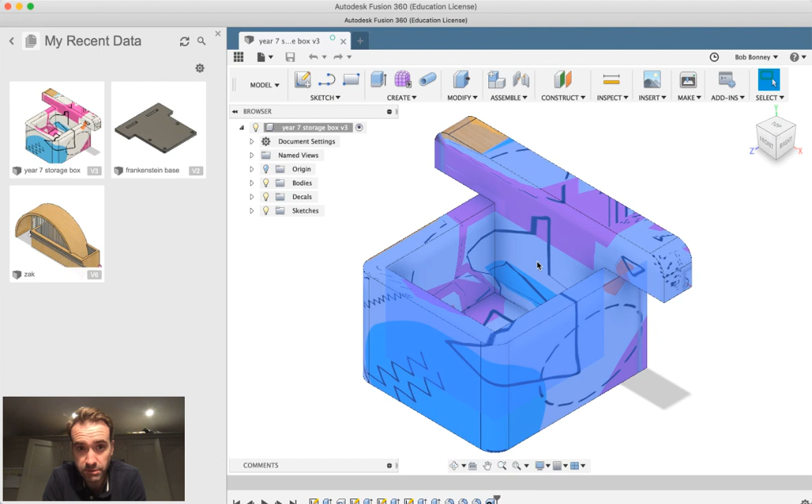This is a bit of an intro into Fusion 360, and as you can see, what we're going to do is we're going to create your Year 7 wooden storage box, and then we're going to add either Memphis or Art Deco as a design style decal, it's called, around the outside.

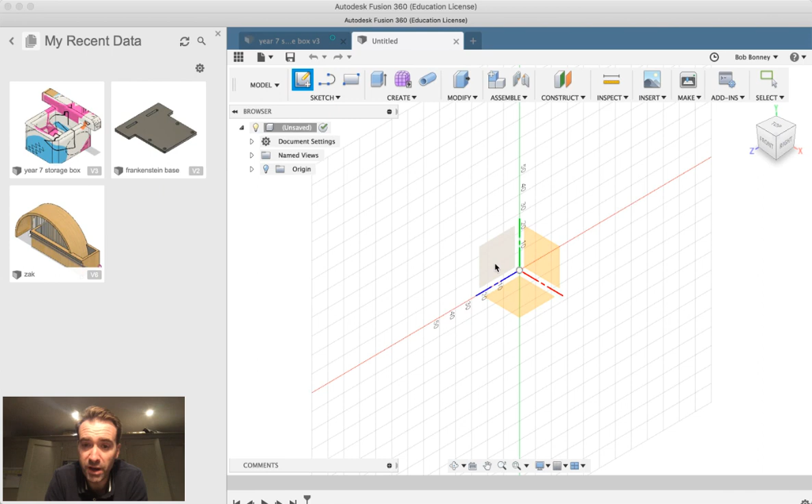So you should have logged on, you should have opened up Fusion 360. So we are going to start with a new file, new design. You create a sketch by clicking on the create sketch button, and these are our 3 planes. We're going to select the one at the bottom because that's the ground, and we are going to add a new sketch rectangle 2 point.

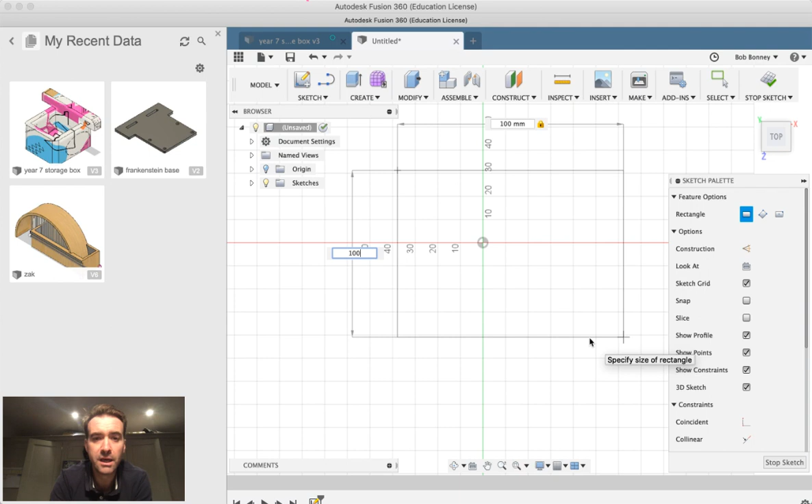Now just draw a square, click and drag and draw a square. Now if I just type in 100, then hit the Alt key or the Tab key and hit 100 again and hit enter, that gives me a square, okay, of 100 mil either side. What we're going to do now is we are going to extrude this square, so we can either press the E key, or up here there is the actual extrude button.

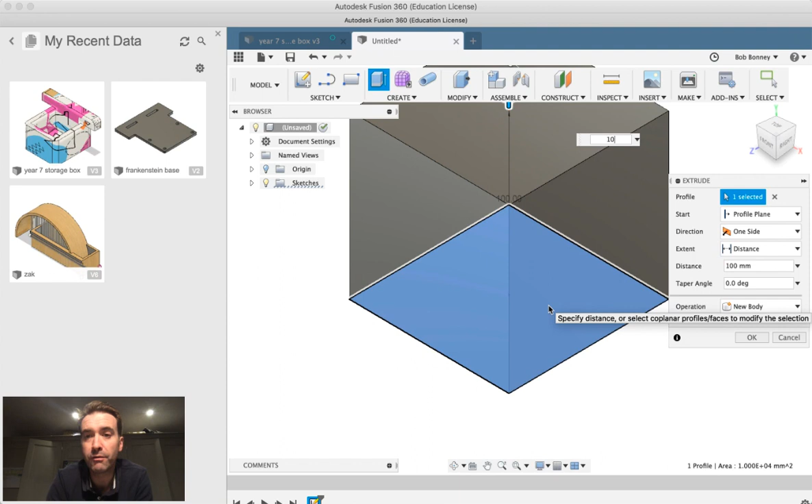Click on the surface that we want to extrude, which is that one, and I'm going to type in 100, or you could have just clicked and pulled this up, okay, but because I know I want it to be 100, I'm just going to make it a cube. Actually, change that. I am going to extrude up to 65, not 100, apologies. Okay, so there's my box.

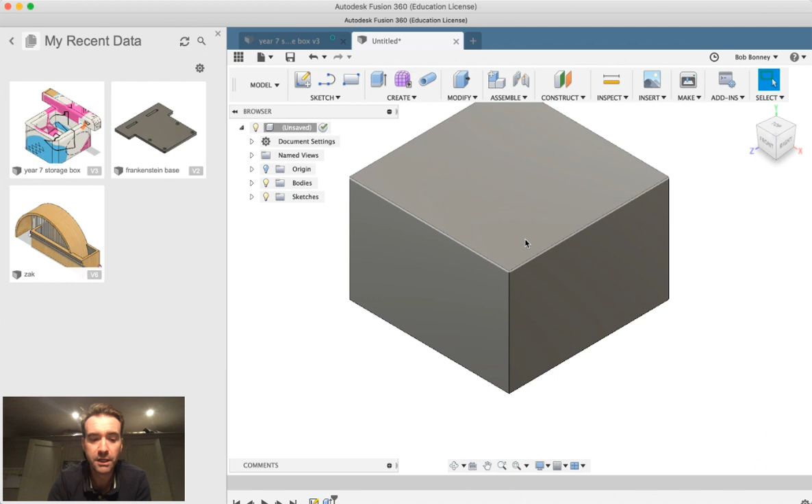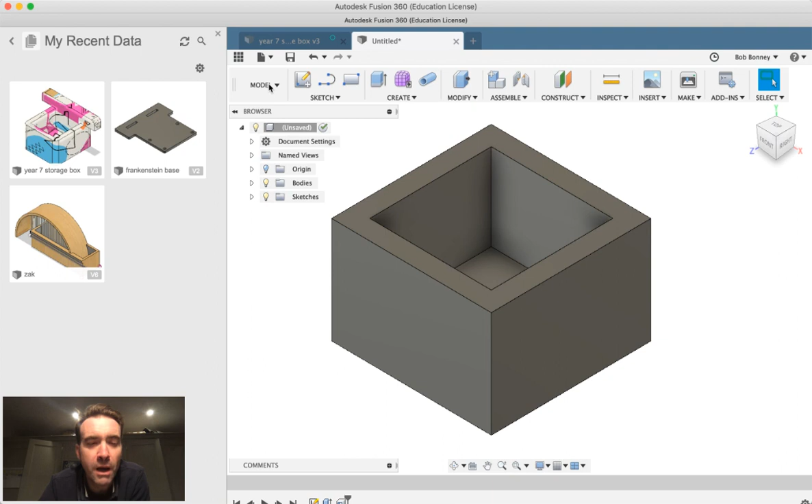But we all know that our storage unit we made is hollow. So a little top tip for that is to hold the right mouse click down and go to shell. Now the thickness of this is 12 mil, so I'm going to hit enter. And what we can do is we can actually see our box. Now, I think we should turn it into wood now. So we'll go up to model and hold down model if it lets me, and go to render.

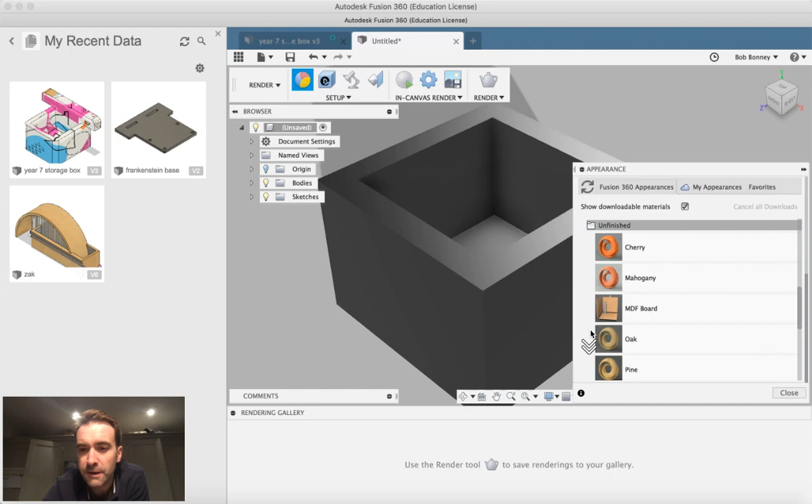Now this is a really cool place where we go to actually render what our actual sides look like, what material it's going to be. This beach ball thing is the appearance. If we click on that, it will open up another window. And if we scroll down and find wood, unfinished, and I might just drag and drop this pine on there. So I think that looks quite cool. Hit render and go back to your model.

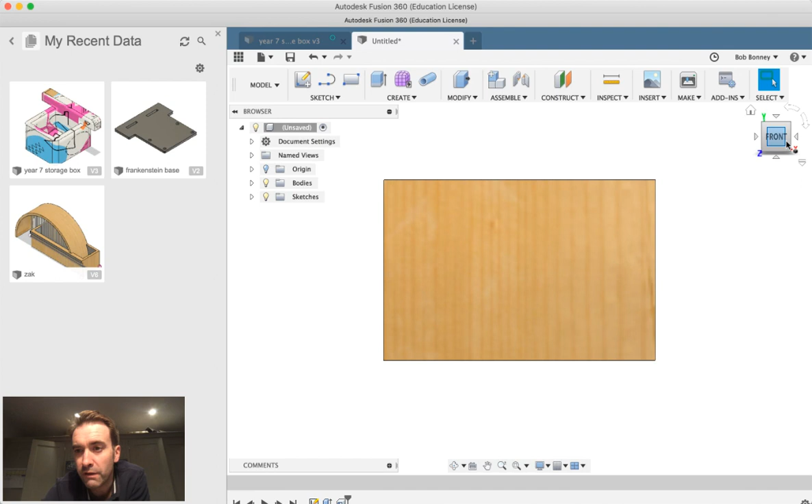Now it doesn't really look like our box yet because it has, and by the way, if you come up here, if you just wait till it highlights an area, you can go to the top, to the front, to the sides, or if you just wait and click on it to the right or to the left, you can actually click and drag, or if you want to reset it again, just hit the home button. And to zoom out on your mouse, you'll have a roller ball, or if you're on a trackpad, you just need to squeeze your fingers together on the trackpad to make it zoom in or zoom out.

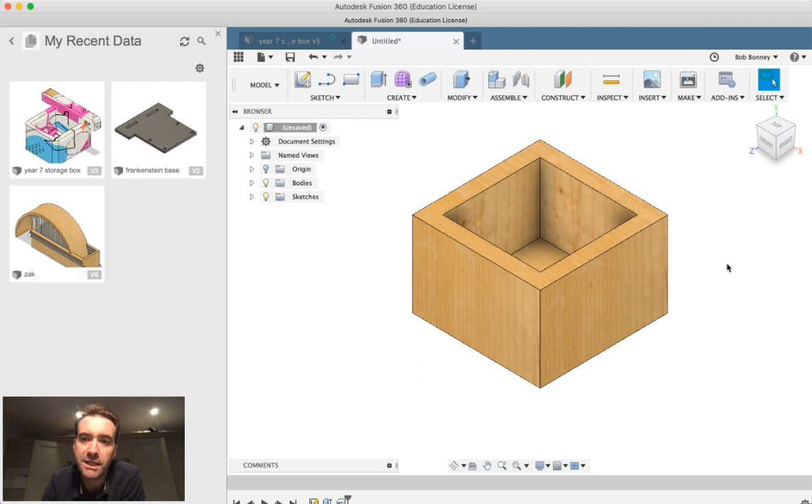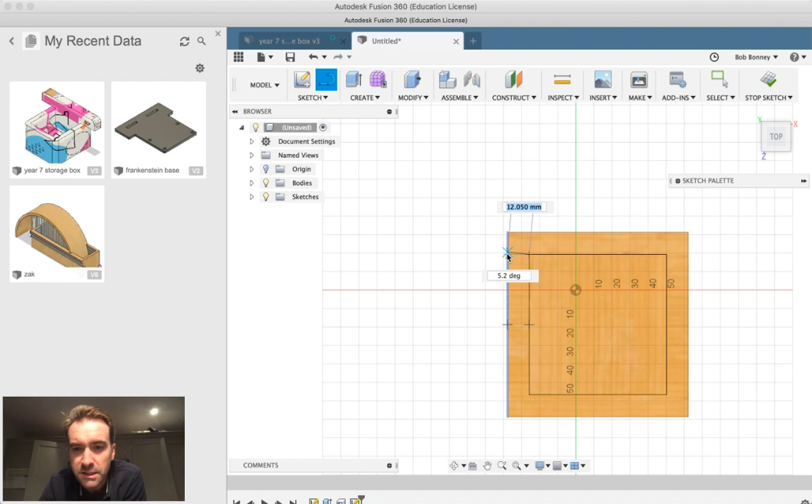There you go. So let's add the T piece at the back now. So if you click on it so that it highlights and create a sketch, I want to use the line tool, and I'm just going to move that out of the way. Click on the corner and go out. Now what Fusion does is it either snaps so it's straight, or what you can do is hold the shift key down, which is the triangle, which is the one above the function key, and hit the green arrow, and then same again on this side.

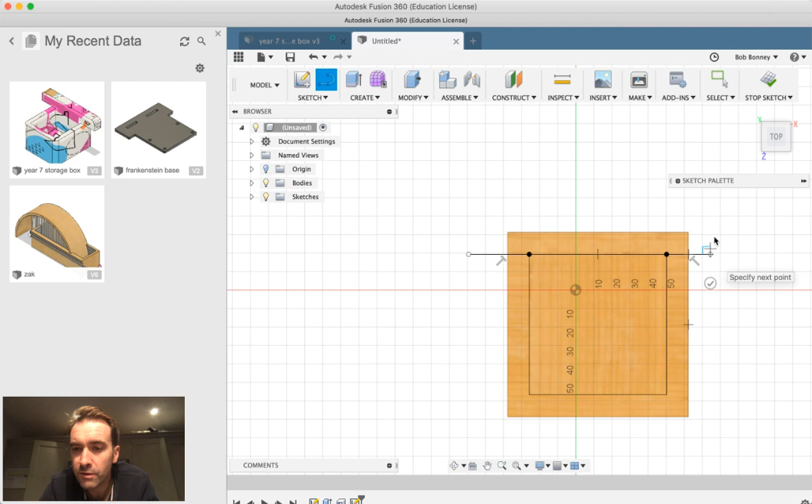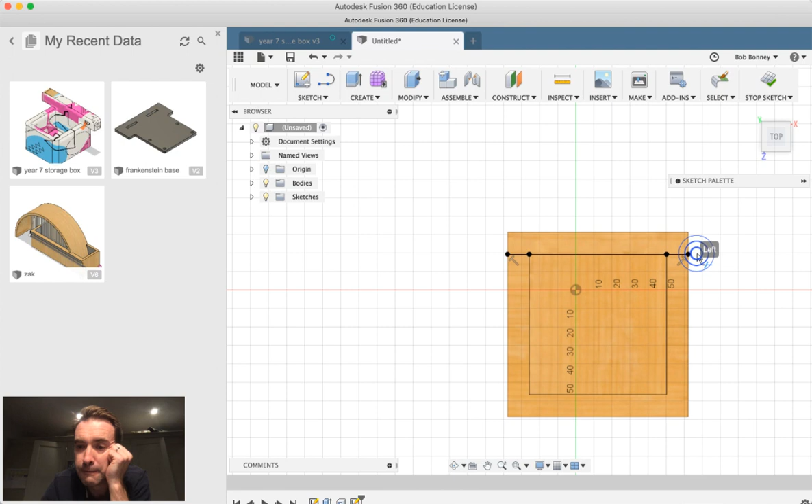Here we go. So that's now taken my line across, and I know that that's going to be fine, but we've got these lines that are hanging over. So if I hit the T tool, that will give me, it's called a trim, and I can actually turn it red, and then click on it. So that gets rid of it. But now we're going to do the same thing. So we're going to extrude up a little bit higher, and I think it's about 35, well, let's say 30 mil, and hit enter.

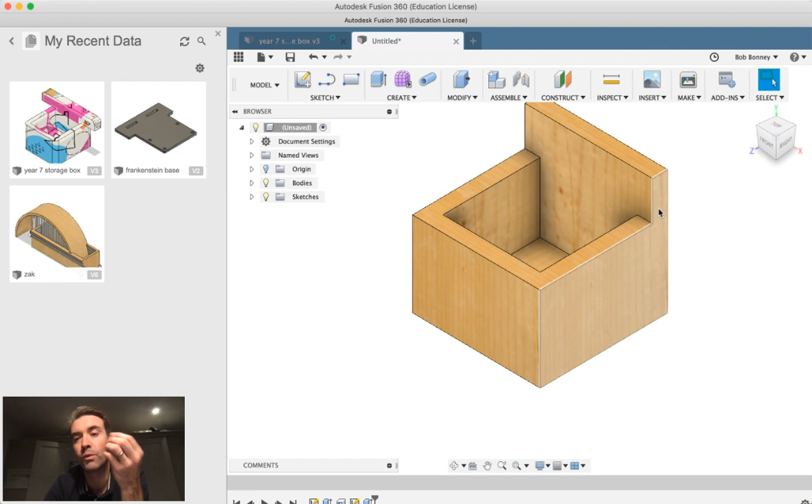Now I want the T piece to have longer arms, so from this bit I want it to come out a little bit further. So again, I'm going to click on the side I want to add a sketch, create the sketch by clicking on the line tool. And these are all just points that will allow me to extrude. So let's go down to that little green tick to say I've finished with that now.

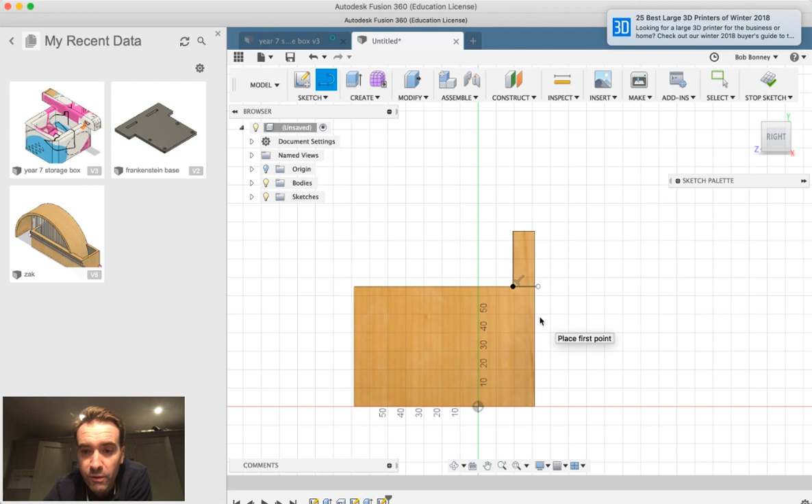I'm going to zoom in a bit, hit the T tool to trim, get rid of that, and then come up here to extrude, click on that bit that I want to extrude. Now, interestingly, I know I want it to be about 25 mil, I think. Let's just check when I hit the home button. Yes, 25 mil is totally fine. And clearly we want to do that on the other side.

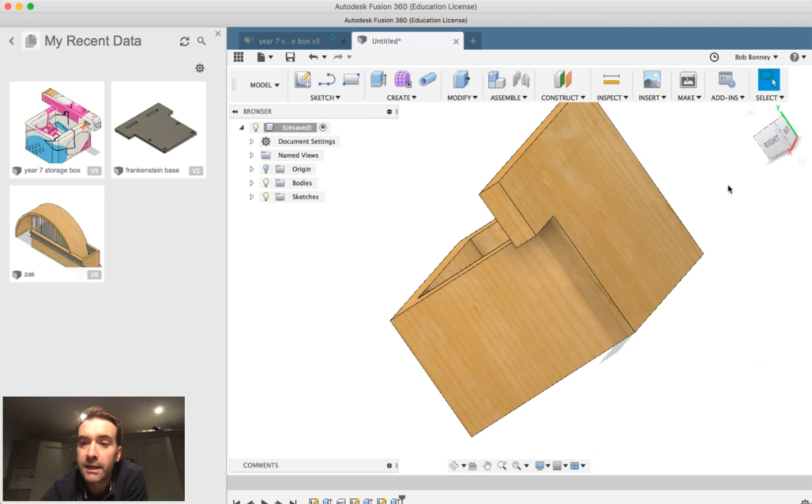So we can just click and drag, click on this side, and we're going to create another line. And then I want to click on that one because I know I want to extrude it, and I think I did it 25 mil, which is great. Click to the home button.

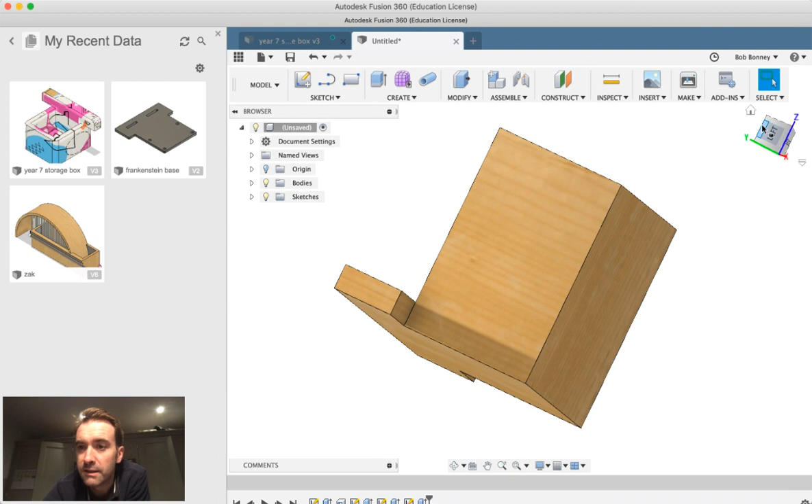Yes, that's fine. Now, some of us have curved our shape, and this looks a little bit thin compared to what we've actually made. So I'm going to click on that, and I'm going to hit extrude, pull it out a little bit further just by eye, and that looks about right, and hit OK.

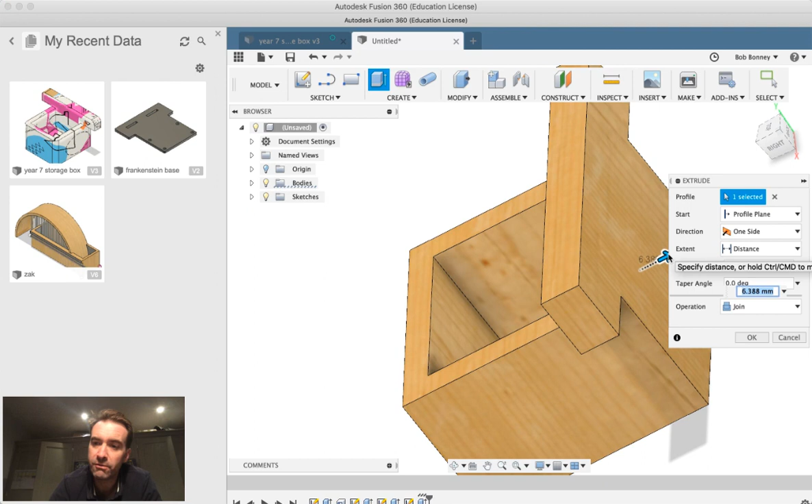Now, let's just go to the home button. On our actual final design, some of us curved these edges. Now, I think that's what we'll do. So if you hit the F key, you bring up the fillet tool.

And if you click on an edge, it will ask you how much you want to take off. Now let me just show you what it does. So if I hit in 10, see it rounds off that corner, which is exactly what we want. So I'm going to hit that.

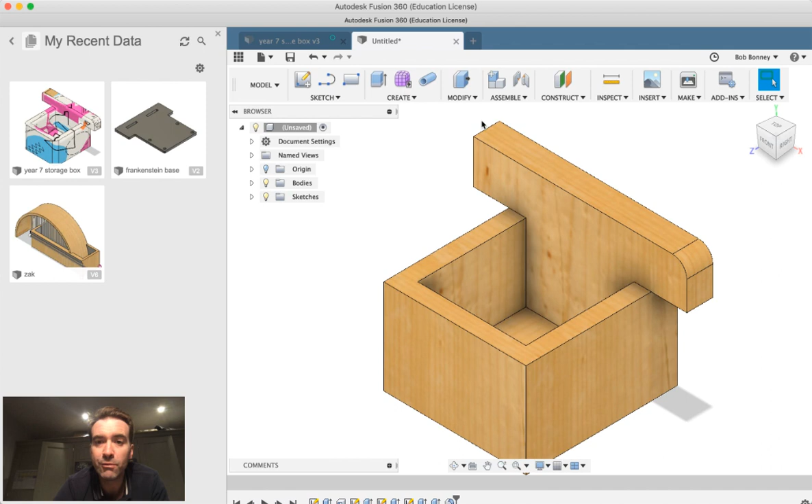You can either click on the line and hit the F tool, or hit the F tool and then the line. I'd like to round off these corners at the front, so I click on the line and hit F, and I don't want that to be 10, I want that to be 5 mil, that's fine.

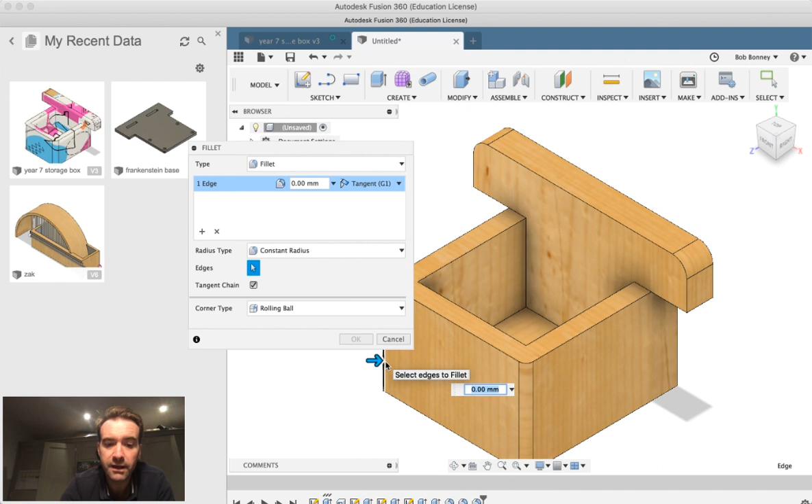And I'm going to hit the F tool and click on that line and 5. And that is it, that is us done. The only thing that I want to do now though is to add a design to it.

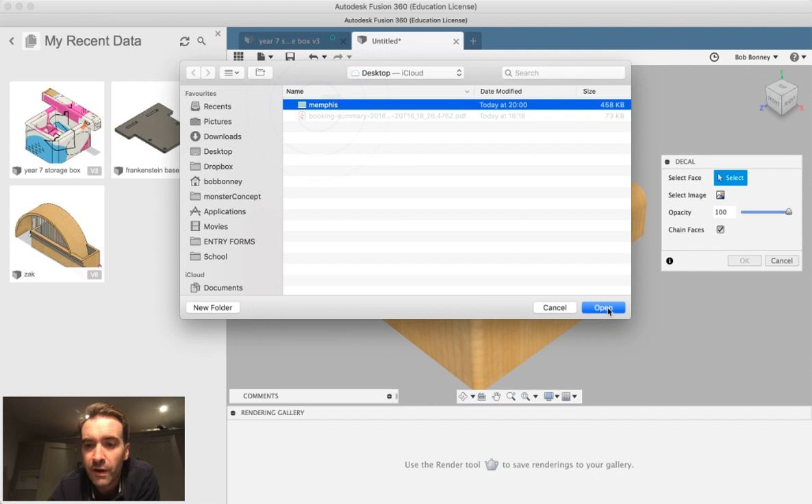So if we go to model, render, and then there's a button in there that says decal. Click on the decal, this window pops up, select your image, and I just found one online before, hit open, and what it does is it should wrap on it and hit OK.

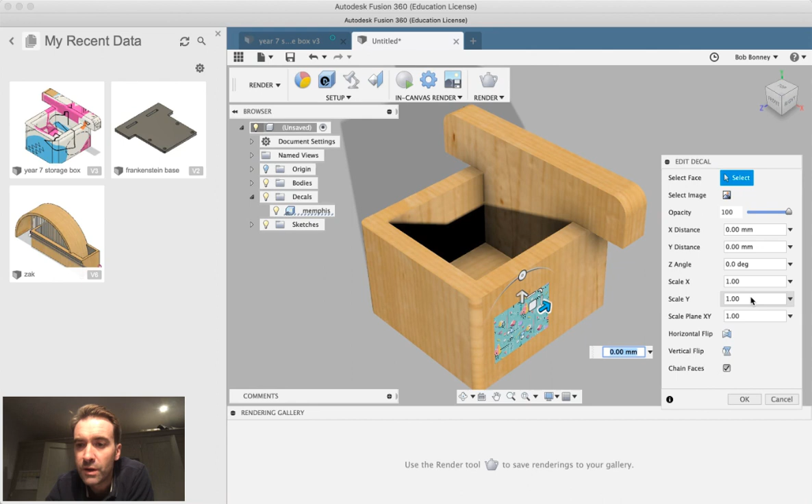Now, if I double click this, if I go up to decal and just say I want to edit the decal, we should be able to scale it up by changing a few things. Here we go. So let's go 5 by 5. And it's just a case of just playing with some of these settings.

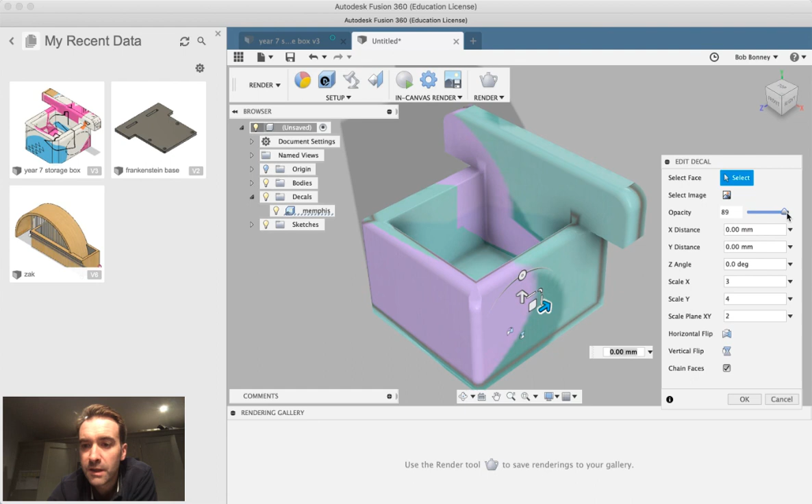That looks quite cool, until we actually get the desired look. I think I quite liked it. It's sort of, no, let's go 1. What does 1 give me? 1 and 1. Let's try OK. That's quite cool.

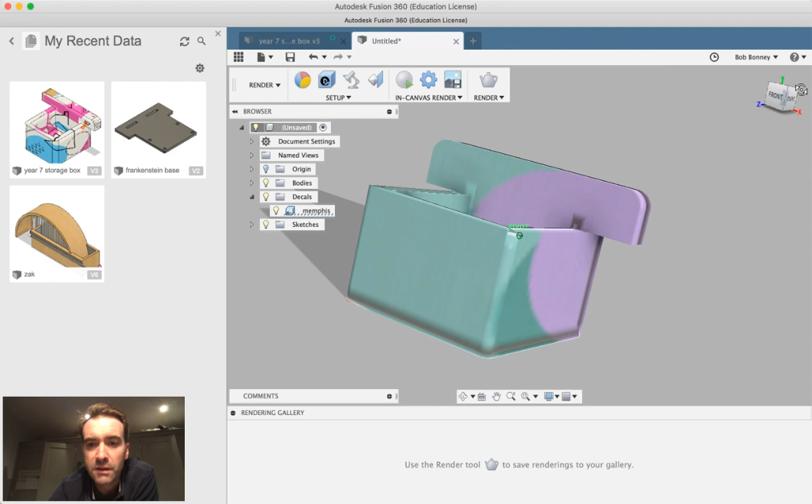And then what we can do is, there is a render button. Now I don't know how long mine will take, but let's just change some settings. So scene settings is the light. If we change the color from grey to white and hit OK, that changes the background, which is quite nice, and hit close. And then I'm going to hit in canvas render.

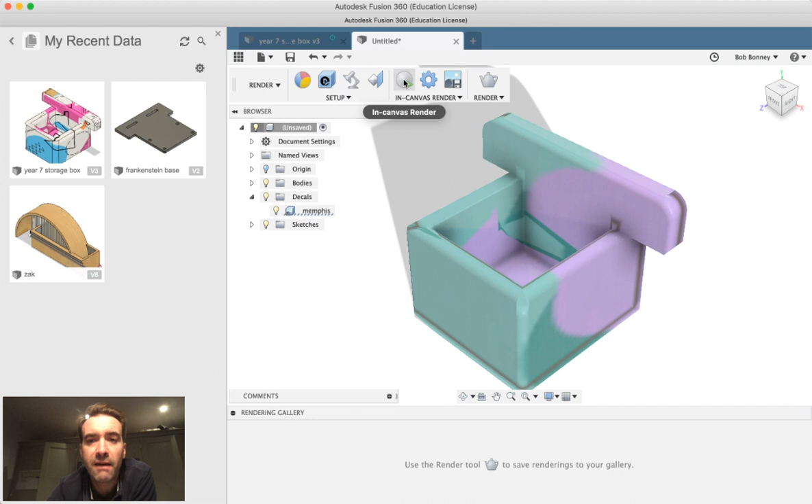And let's just see how long that takes in a second. So I'll just pause this and I'll come back to it when it's finished. And what you get is lots of light bouncing off it, so it will take quite a while. So I'll pause the recording.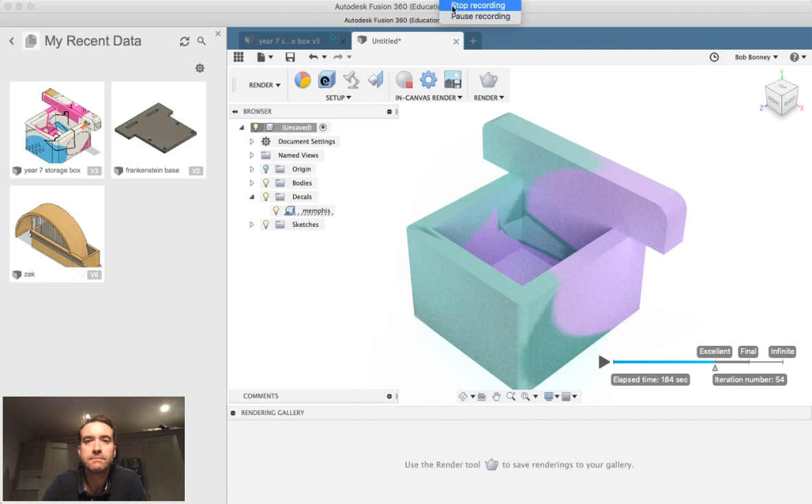Okay, so it's taken a while, but that is the final render. To be fair, I think I really prefer the other one that I did, that I showed you before. But, you know, it is what it is.

What we can do now is we can screen grab that. So on your PCs, you've got, I think it's Control, Print Screen, open up a Word document, Control, Paste, or Copy and Paste. I'm not sure how you do it in Word.

But what I want to do now is go model and produce a drawing from this design. So if we go, and we can put this drawing on the back of your actual booklet, which will look amazing. Change it if it's not already. Let's go A4 and just hit OK.

And then that will launch us into the drawing mode of Fusion 360, and we can do like a first angle orthographic drawing, which will be brilliant and really important. So you can see you've got a nice big space. If we choose to put it up here, and then we'll do a projected view from down here, and then can you see it actually gives us some options, and basically wherever we hold our mouse and drag it up, it will give us that angle, which is great.

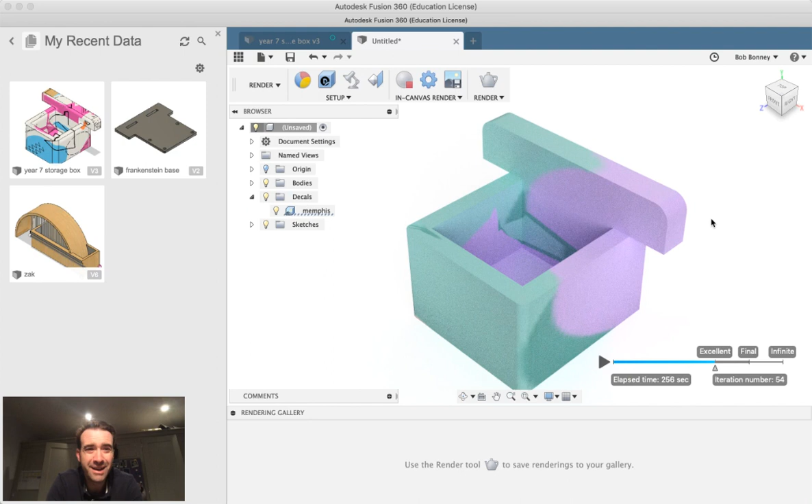If we print that as well, or postbox it to me, that'll be great. And we can stick that in your book, and that's just another string to your bow about producing using Fusion 360, which is an amazing CAD package, for year 9, year 10, year 11.